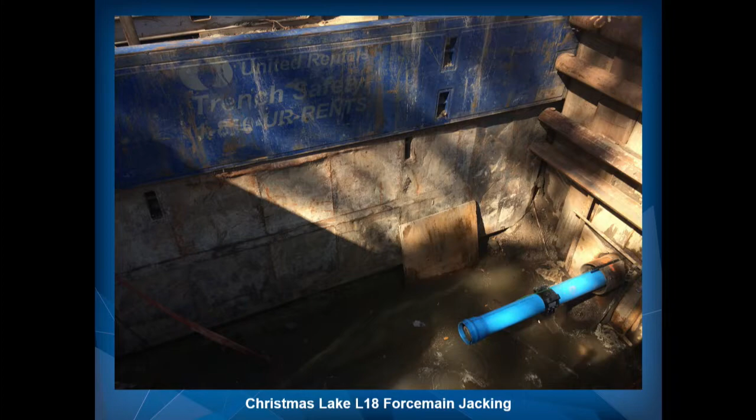This is tunnel inspection in St. Paul. This is an old sanitary sewer interceptor in the sandstone, and they just lined part of it, the invert, and came up the walls maybe halfway. The problem here was a lot of deposition in the sewer that has to be cleaned out. The wastewater flowed over the deposition and eroded the sides of the sandstone, so it's important to keep these facilities clean. It was problematic because it damaged the pipe.

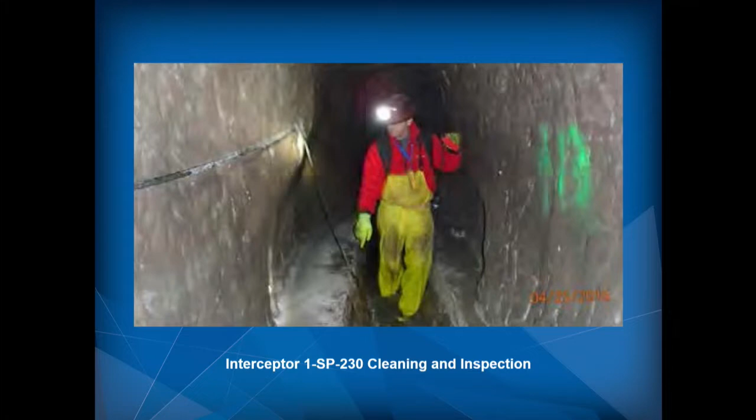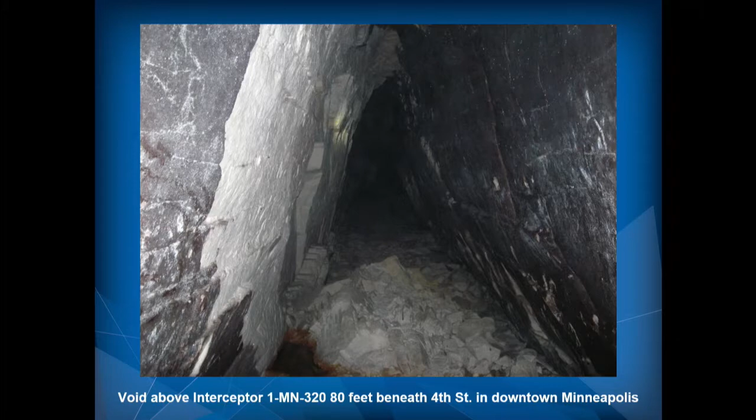This is on 4th Street, Minneapolis. This is a cavern above the Interceptor sewer. We have a project ongoing to fill this cavity. It ranges from about 2 feet in height to 16 feet above the pipe. This is one of the projects that's ongoing now, showing how we've utilized the past contract.

This is another facility, a tunnel in Woodbury, with reinforced plastic mortar pipe installed in the tunnel. We did some CCTV inspection and saw some cracking, then some deformation and water leaking in. This is a current project we're investigating, and there will be a project to correct this situation.

So the proposed action is for the council to authorize the regional administrator to negotiate and execute engineering services master contracts with Brierley Associates and CNA, in the amount of $1 million for CNA and $500,000 for Brierley Associates.

Are there any member questions? Councilmember Letofsky. Thank you. I'm just wondering, how long does this contract last? How much work do we get out of these 2 contracts? Is it annual, or is it through the course of the capital project? I might have missed it, but I don't see it referenced anywhere in the documents. Madam Chair, the term of these contracts is 5 years. Thank you.

That was my question. Other questions? It's my question too. Great.

If there are no further questions, is there a motion? I'll move the motion, Chair. Second? We have a motion and a second. All those in favor, please say aye. Aye. Opposed? The recommendation passes. Thank you.

Are you up for the next one? Yes, I am. Thank you.

Item 2018-151 is the Minneapolis System R04 tunnel adoption of amended facility plan. Madam Chair, this business item requests the Metropolitan Council to adopt the facility plan amendment for the regulator R4 and 1MN 344 tunnel rehabilitation, MCES project number 807-829-629, per the attached resolution number 2018-6.

You probably recognize this image from a presentation we did authorizing the public hearing, when we've had the public hearing. This is the same project. This is the area around Minnehaha Falls, along Minnehaha Parkway, and the inset is where most of the work's going to occur.

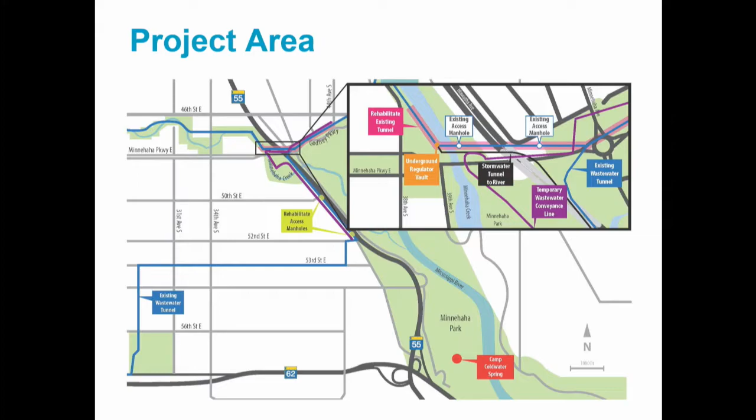So we have a situation where we had conducted some facility planning and embarked on a design, determined that we were replacing facilities, and determined that we were going to impact the water that feeds Coldwater Spring. And when we found that out, we determined that it was a violation of state law.

We put the brakes on, reevaluated options, and came up with another method. We did extensive hydraulic modeling and other investigative work, and that tended to indicate that there was a possibility, maybe slight, but a possibility, that we could impact the spring with our relocation. So consequently, we looked at other options.

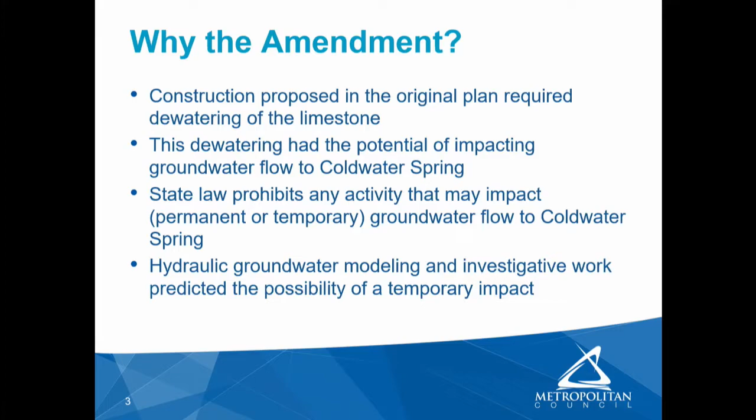The original facility plan was adopted back in December of 2012. It had a different title and a different project number. It was for a group of projects, one of which was this work. Once that one was adopted, we created another project, a sub-project to that family, and that's what we're doing now.

When I got into writing this business item, I realized that the resolution was for the original description, and I thought an explanation was needed for you folks to understand that it really is the same project, it's just a sub-project.

These are proposed changes to the recommendation in the facility plan. This is what the amendment's about. Originally, we're going to replace facilities at a cost of about 28 million bucks. And then we revised the facility plan to add a little bit of work, the shaft work is an addition. We're rehabilitating the structure as well as the tunnel, and that all totals to about 31 million.

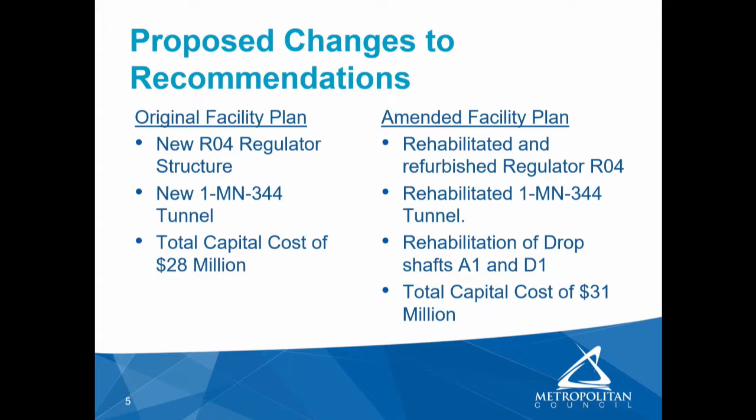When we do facility planning, we look at alternatives, of course, and there aren't a lot in this case because, well, you always look at doing nothing. The other two options were to replace the facilities, and we know where that went -- we'll impact the spring. And then we have the rehabilitation. Within rehabilitation, there might be a couple of options in terms of the lining, but that's about it.

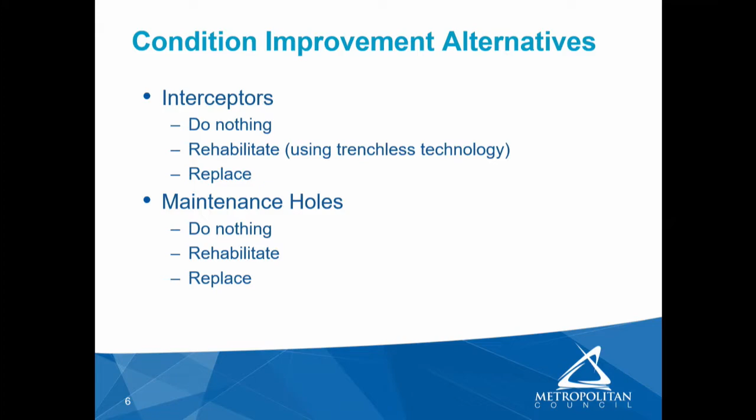It applies to both the Interceptor and the maintenance structures. The maintenance structures will be rehabilitated from the inside. This is an evaluation, more qualitative, and again, this indicated that rehabilitation was the way to go.

Like I said previously, the replacement would have a big environmental impact, as well as social. These are important ground features to the tribe and to the Friends of Coldwater Spring.

The rehabilitation option has more surface disruption. It's temporary -- it'll be running temporary conveyance pipe overland through the park. It'll impact park usage and trail usage. We'll make every attempt to minimize that. We'll work with the park board to come up with good alignments to avoid impacts.

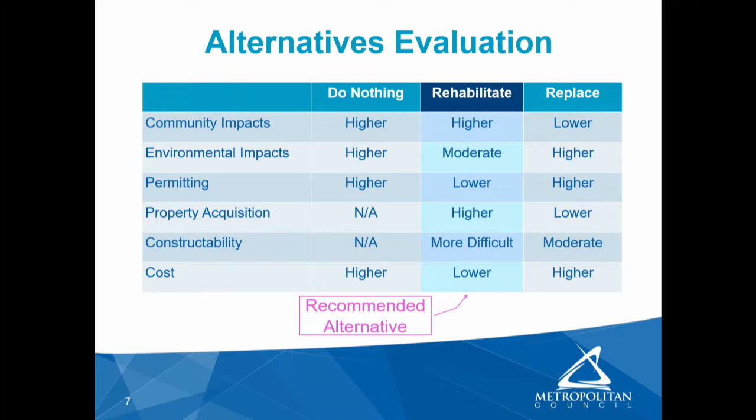Why is the property acquisition higher if you're just rehabilitating? Madam Chair, property acquisition for rehabilitation is higher because we have to get temporary easements through a long line in the park, and we'll have to acquire easements from the park board to do so. There's also a few private properties that we'll have to get property rights from. Those permanent or temporary? Temporary.

For a lot of the reasons I've already stated, the rehabilitation project is recommended basically because it doesn't impact the spring. And the cost is roughly the same, maybe a little less than the replacement options. In fact, I think it's less if you don't consider the shafts, which weren't in the original option.

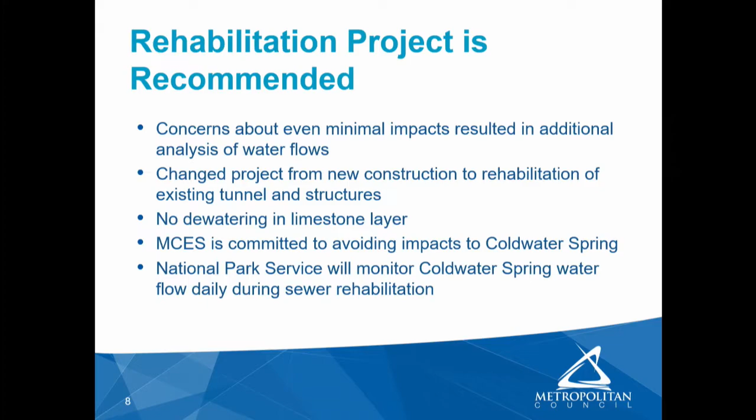So the project scope includes the rehabilitation of the tunnel and R4, the regulator structure. The regulator structure is a pressure relief valve, let's call it, that protects the facility from a catastrophic failure. It maximizes flow through the hydraulic structure, but protects facilities upstream and downstream from being overloaded. As far as regulator R4 is concerned, the improvements are to improve the concrete surfaces on the inside, provide a new orifice, which is a hydraulic device, and provide a new gauge structure on the overflow to the storm.

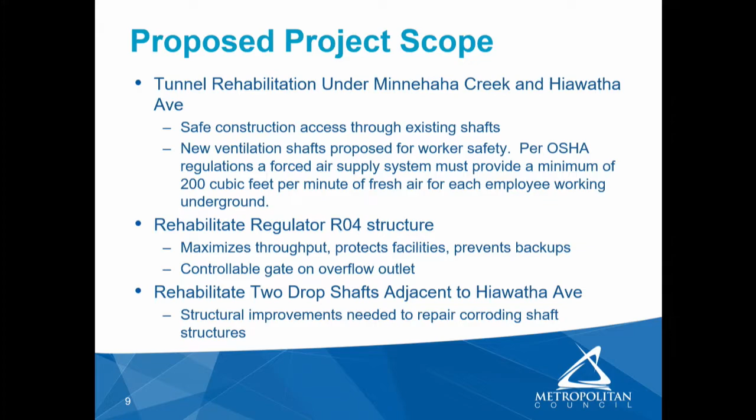Also included in the scope of the contract will be cleaning the tunnel. That's necessary to recover some capacity that's been lost due to settled materials, and I don't think it's ever been cleaned. We did some sonar inspection a couple years ago and determined there was a good amount of material that could be removed, thereby regaining some capacity.

Total capital cost is estimated to be $31 million.

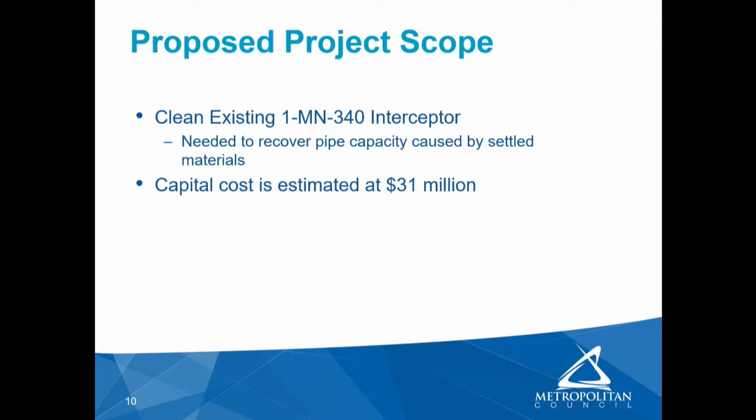Now we're at a point where we conducted the public hearing. It was done on May 22nd. We had a pretty comprehensive outreach program that included a public meeting that was lightly attended, with 5 participants. Then we had the public hearing on the 22nd where 12 people spoke.

There was a mix of comments, but primarily they were happy that we took a step back and looked at the alternatives and came up with one that would not impact the spring. Others were concerned about temporary park and trail access impacts during construction, and also concerned with tree loss. When we set up the pumping facilities on the north end of the park, there may be some tree loss, but we won't impact the important trees as determined by the park board. There's a couple oak trees we'll avoid. The other trees we'll replace when we're finished.

However, they were generally in favor of the project, and I think we can work through those comments. The Friends of Coldwater Spring and the Mendota Mdewakanton Dakota Community are opposed to the use of ventilation shafts. The ventilation shafts are required to produce a safe environment for the workers down below. OSHA requires that we have forced ventilation, 200 cubic feet per minute per individual underground. That's law, we have to do that. And they're opposed to it.

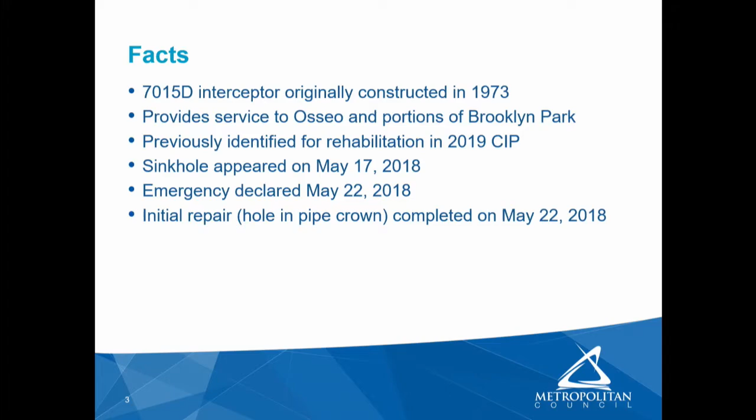So the repair scope is that we are retaining the services of a consultant under our master services agreement, very much like you just approved, but a different group of consultants. We plan to improve about 1,000 feet of cured-in-place pipelining in this 15-inch pipe. We'll also rehabilitate the manholes, construct an additional manhole structure to facilitate the temporary wastewater conveyance. This project will include temporary wastewater conveyance, and then we'll restore the pavement surface, with an estimated construction cost of $1.6 million.

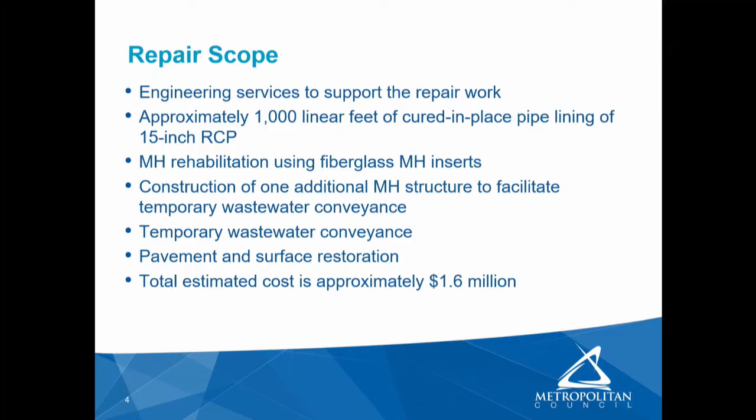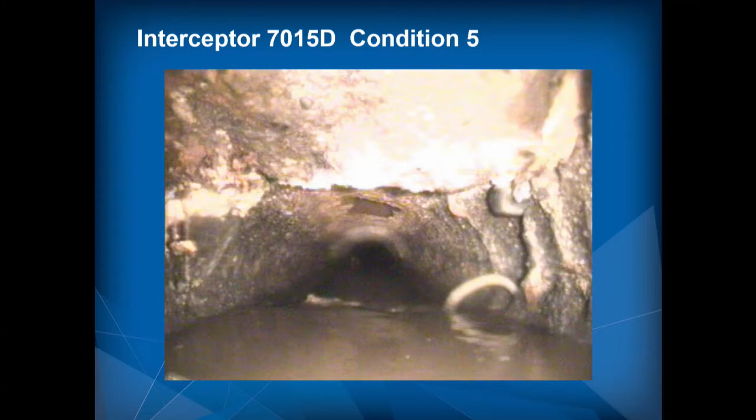So there's our Thrive Lens analysis: to invest efficiently and effectively in our system, to always maintain and restore our system capacity as quickly as possible, and to protect and enhance the region's natural resources. So with that, we would request that the council ratify the justification for and the declaration of emergency for repairs to Interceptor 7015D in Brooklyn Park.

Questions, committee? Councilmember Letofsky.

I have two questions, and I wanted to ask the silly one second, but I can't remember what the first one was. So, what's the system of numbering the interceptor pipes? Looking at this, it's kind of all over the place. I may have to seek some information from our historian. On this particular location, much of our system was acquired from the cities that originally built it. So you'll see like 1 GV 461 is an interceptor built by the city of Golden Valley, or there's one in Robbinsdale, one in Richfield. The further naming of them afterwards, I'd have to check into for you.

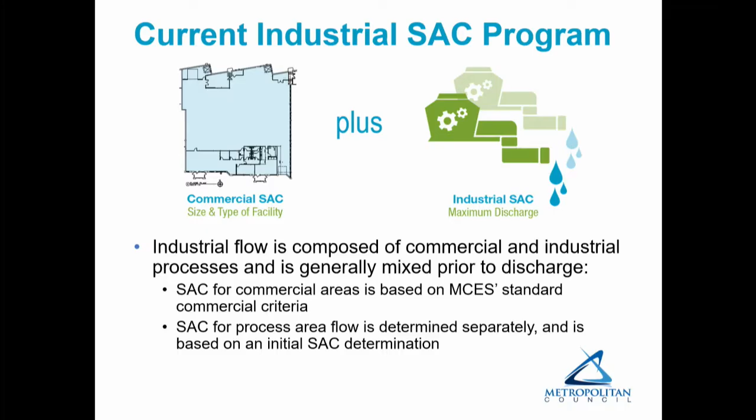The other way I like to think about that is the commercial SAC is for the people and what they're doing in the building, and the industrial SAC is for the machines and the process that the business is doing. So once a facility goes on permit with us, they're assigned a SAC baseline.

That will be either the amount of SAC they've purchased. It could include any grandparented SAC that has come in.

Every 3 years, 1 year prior to their permit renewal, they're all on 3-year permit renewal, at least most of the standard ones are. 1 year prior to their permit renewal, their actual discharge is compared to what their SAC baseline is. If their baseline has been exceeded, they're told that they have to purchase these additional SAC units to bring their baseline up to what their current discharge is.

We do that 1 year prior to the permit renewal so that the company has a chance to reduce their flows. They might put in some capital program or a business process change that can bring their flows back down. We always want to encourage water reduction instead of just paying us more SAC. We think that's a better use. So they have that 1 year to either reduce their flows or to budget for these SAC payments.

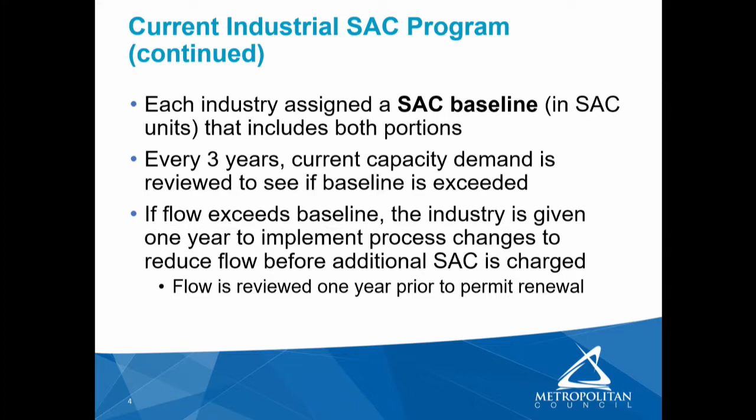Then when the permit is renewed, they get a requirement in the permit that they have to purchase the additional units. If they've reduced their flow, they have to do a 30-day volume study to prove that they have reduced their flows. That becomes very difficult for my staff and for the companies.

Because it'd be very easy for a company to decide they're just going to watch their flows for 30 days. They get to that point, we can prove that our flows are down, we're going to turn the valves down a little bit, because this is going to cost us a lot of money.

And so my staff of permit engineers have to go out and determine, is this a real business process change? Did they make a capital improvement here? If they did, the 30-day volume studies have to be conducted. A lot of times at that point, they've done some major work, but they're not quite there yet, and they need an extension on that. So it's a lot of back and forth with the companies.

And what we find is that since it's 3 years in between, their flows can be exceeded for that whole 3 years and go down right at the time of the permit renewal. If they've made a major process change, we'll see that it remains low. If we've missed it and they've actually just reduced it by conserving water and being careful, 3 years later they come back and their flows are way up, and we go through the whole process again.

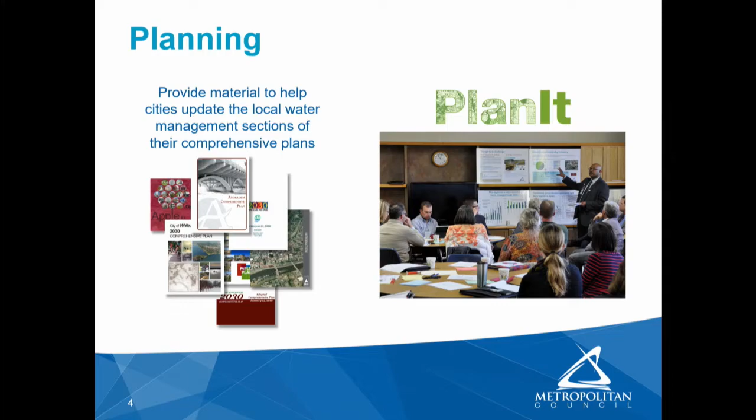Before you go on. Judy, was the planning an online thing, or was it workshops?

Madam Chair, it was a combination of things. There were two big workshops, large meetings where we did trainings, and then several webinars, and online materials that were handed out. So it was a whole bunch of different resources to try and get at all angles of how people wanted to get the information, as well as online documentation they could read through.

For the collaboration piece of what we're doing, we've been really working on increasing the collaborations, partners, and stakeholders we've worked with this year, with that end goal of empowering action so that we can protect and improve the region's water resources.

Examples of collaborations we were part of included, as I mentioned, CAMP. We also have WOMP, our Watershed Outlet Monitoring Program for streams, where we partner with several entities and agencies to help monitor stream condition.

We've put on some workshops and trainings in the past. We also sit on advisory committees to cities and watersheds to help them in their plan development, and we work with a lot of state agencies on advisory committees. We spent a lot of time last year working on the governor's initiative and planning for that.

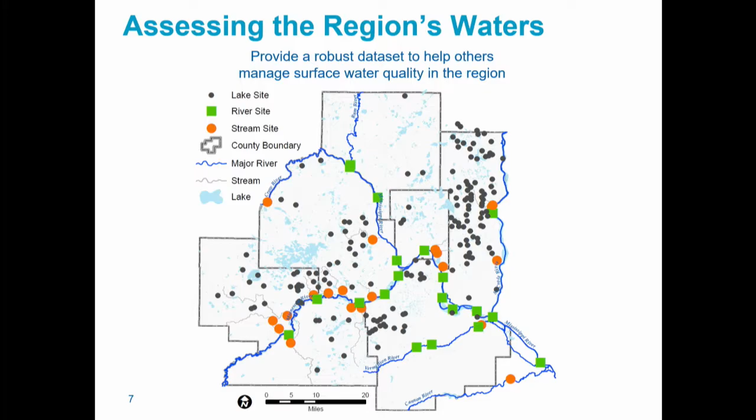So Judy, I think we've asked you this question before, but you're going to have to refresh my memory. You've got a large concentration in Washington County of lakes, and not so much in Anoka and Ramsey. Is that because you have more volunteers in Washington County, or is there some kind of active group?

Sure, Madam Chair. We've targeted, and our sites have changed over the years. Ramsey County has their own program, and Hennepin County has theirs, like the Three Rivers Park District does monitoring, so we work really hard not to duplicate efforts. We're kind of filling the gaps. Some other years we have more in Anoka County, but they try to put theirs on like a 3-year rotating cycle, so some years we have more in that county. And there just aren't as many lakes down in Dakota County, so that would be why.

So along with collecting all this great information, we share that information and make it available to our partner agencies for their use. All the information is available in our EIMS system. People can download the raw data, download reports, and there are 1-page summaries on the water body or stream the samples are from, giving general information. That's been really important over the years.

I wanted to go into some of the stormwater and grant investments we've given over the last 2 years. We had the Stormwater Grant program from 2017, where you awarded grants to 8 projects in 6 different watershed districts.

All of those projects are under development right now, so none of them are totally built out yet, but two of them are reuse projects. And the rest are really projects that involved surface water infiltration, stormwater infiltration practices, other surface water practices and stormwater practices, along with education components and monitoring to see the effectiveness of these.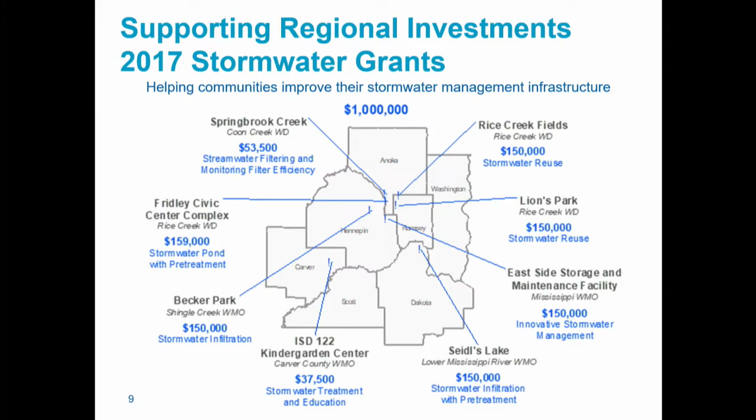This was the third year of the Stormwater Grants program, so we've given out $2.8 million for that. Our first grants that were awarded in 2015 are now wrapping up and closing, so we'll be able to bring back some pictures of some of the things that have happened there.

The second program from last year was the Green Infrastructure Grant Program, which was focused on cities. I should have mentioned the first Stormwater Grant Program was eligible if you were a watershed organization. This targeted cities and getting them involved and eligible for funds.

The funds that were awarded: one was for a reuse project, two were for I&I projects. One was like an I&I infiltration study, and one was an I&I infiltration compliance program project. Those are going to be used to help inform the private I&I work that we're doing now.

There's also one that was strictly a stormwater infiltration project, and then one that really went about trying to address stormwater, surface water, and I&I. So they set up a grant program to supply grants for either conservation for water supply, installing rain gardens and other best management practices for stormwater, or for focusing on providing grants for I&I.

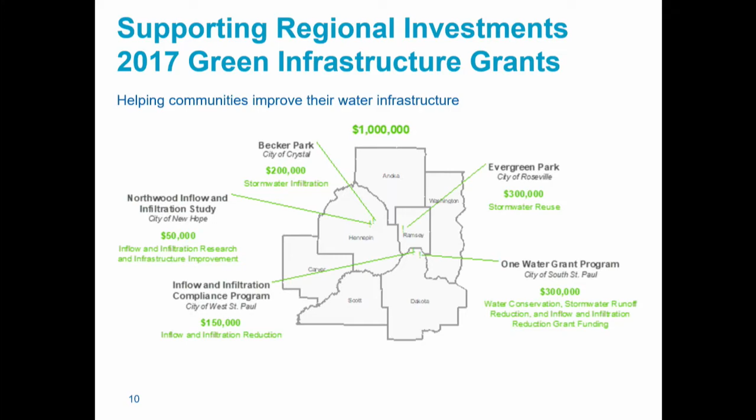So the handout that I mentioned earlier kind of sums up and is a nice little recap of what we did in 2017 and sets the stage for 2018.

Overall, I would say our real goal this year and last year has been really to meet with our partners, get more feedback from them, and learn what we're doing, what we need to tweak, and what's providing most value to them. We've been really committed to that. We continue to visit with partners and gather that information.

We have developed a customer survey that will be sent out this summer that will also get us feedback. We'll use that feedback to make adjustments and tweaks to our programs to make sure we're still providing the most value that we can. We also have a new goal for data delivery this year, which is huge for us.

So getting our chemistry data, our water quality for our lakes and our river and stream information out to users of the data sooner. In the past, it has taken us usually till March and sometimes into July for the actual flow data to get that information out there.

This year, we had a goal of getting all that data out to people by the end of January so that they would be able to use it in their annual reports that are due. And it was a really concerted effort.

We have some new tools to help us get the data out there faster, and we were able to get the data out to people so they could use it for the reports, and that has been very well received. That's what we're really about, is getting data out there for people to use to make informed decisions. This was a great step for us, and we'll continue to try and improve that over the next years.

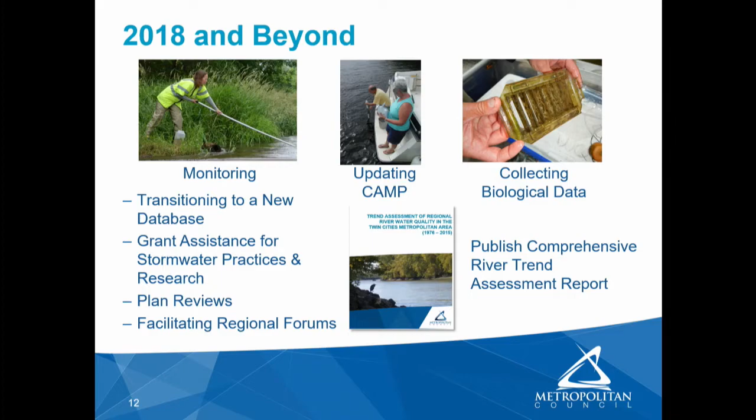I guess if you have any more questions, I'm happy to take them.

You keep using the word partners, so help me understand who all our partners are. Sure, so we have a lot of partners.

For the lake program, we partner with general citizens helping sample our lakes, with soil and water conservation districts, cities, and watersheds. In the watershed outlet or WOMP stream monitoring program, we mostly partner with soil and water conservation districts and watersheds, as well as state agencies. We sit on many subcommittees of the interagency coordination team talking about monitoring, groundwater modeling, communication, and the performance report done every year. We work on all those groups with people.